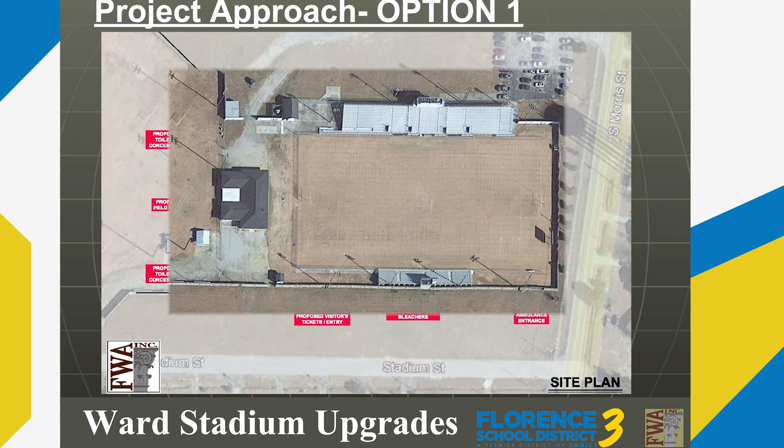First, you'll see option 1, the Ward Stadium layout, shown on Google Maps. The presentation will show keeping the existing stadium, the existing natural turf, and the existing stadium seating, which seats about 2,200 on the home side and about 1,200 to 1,500 on the visitor side. What we will be replacing is the new field house, new toilet concessions buildings, new ticket entry areas and plazas, and new sidewalks to make the entire complex accessible.

As you see in the site plan here, there is a proposed field house where the existing field house is located now. That building will be torn down and a new field house of about 5,000 square feet will be built in its place. We'll look at the floor plans in just a little bit.

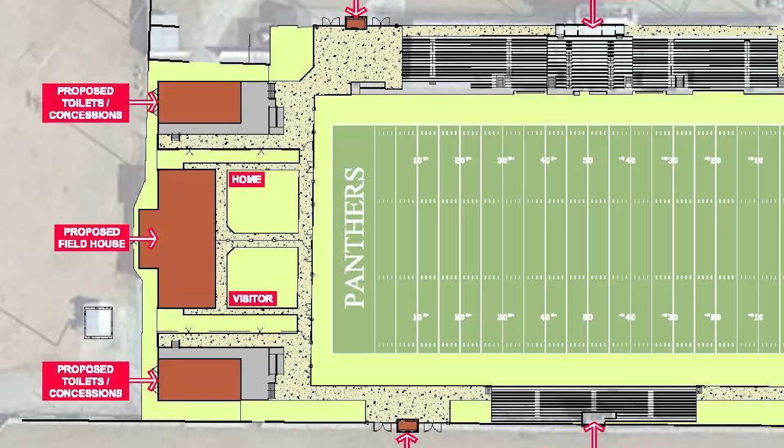On either side of that are the proposed toilet concessions buildings, one for the home side and one for the visitor side. They will be separated by fences so that the visitor and home sides cannot cross-mingle with traffic, just from a security standpoint. You'll also notice proposed visitor and proposed home ticket booth entry areas for separate entrances coming into the stadium.

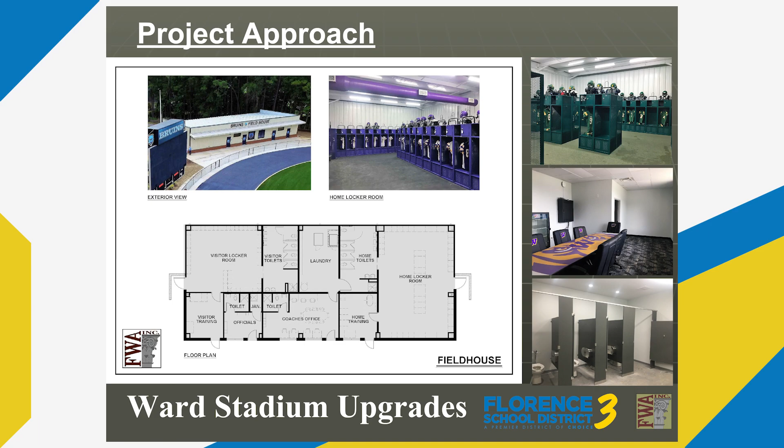Now let's look at the floor plan of the field house. You'll see it's about 5,000 square feet. This plan is a little different than the one we'll have at Lake City High School. We'll be adding about 4 showers in each of the field houses that are not shown in this drawing.

In the home locker rooms, you have home locker rooms, home training areas, and home toilet and shower areas. On the other side, you have separate visitor locker rooms, visitor training areas, and visitor toilet and shower areas. In the center of the building are coaches' offices with their own toilet and conference room areas, and to the left is an officials area for dressing, plus their own toilet area.

You can see photographs of what we built in Florence for the locker room areas. The home locker room will seat about 50 to 55 athletic-size lockers, as shown in the photographs. The visitor side is a little smaller, fitting about 45 athletic lockers in that space.

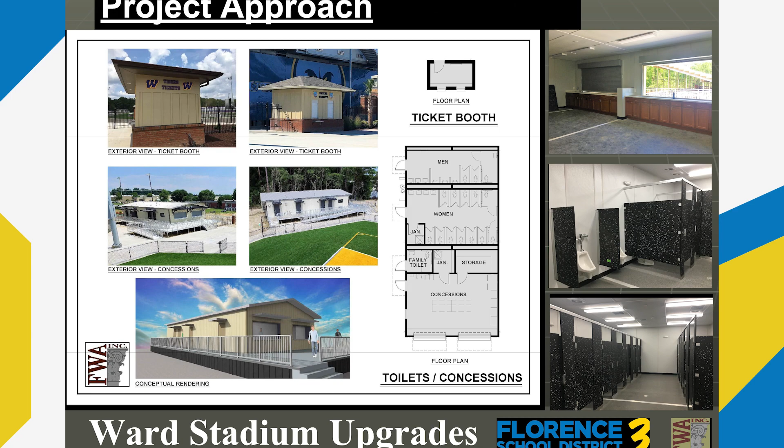The next slide shows the toilet concessions building as well as the small ticket booth areas for both home and visitors. The toilet concessions building is comprised of 6 men's toilets and 12 women's toilets with lavatories and a janitor's area. There is a family toilet separate from the men's and women's toilets, plus janitor's and concessions toilet areas. The concessions area is about 16 feet by 24 feet in size.

Each side, both visitor and home, has one of these toilet concessions buildings. They are separate from each other for security, but are exactly the same layout. You can see some of the layouts in the photographs we have from the Florence schools as well.

What's important about this particular building is that these toilet concessions buildings are modular. They will actually be built in factories and then brought to the site already put together. This makes both the time and the cost less - the cost is less expensive, and the time to erect them is a lot quicker. The field house we looked at previously is actually a built-on-site metal building, a slab-on-grade building.

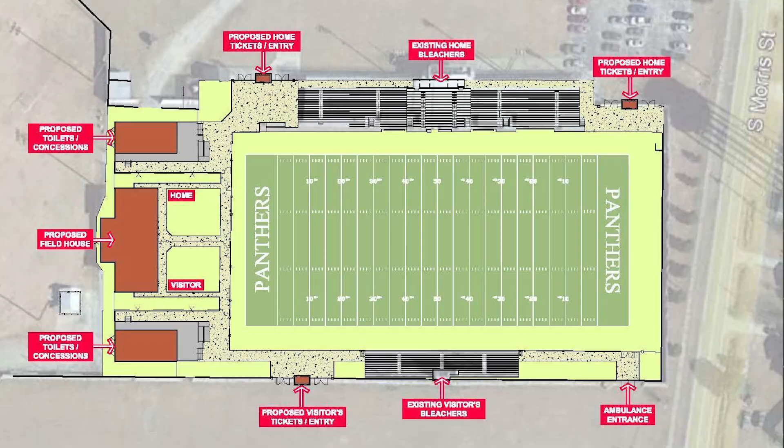So in this scenario, with option 1 at Ward Stadium, the existing bleachers will remain and the existing natural turf field will remain as well. The facilities will be upgraded, and you can see the cost breakdown of the field house, the concessions, the site work, the sidewalks, the new fencing we're adding, landscaping, and furniture, fixtures, and equipment. This comes out to be about $3.3 million for this particular project. With professional service fees, civil engineering, soil testing, and special inspections, the final cost is estimated to be about $3.6 million.

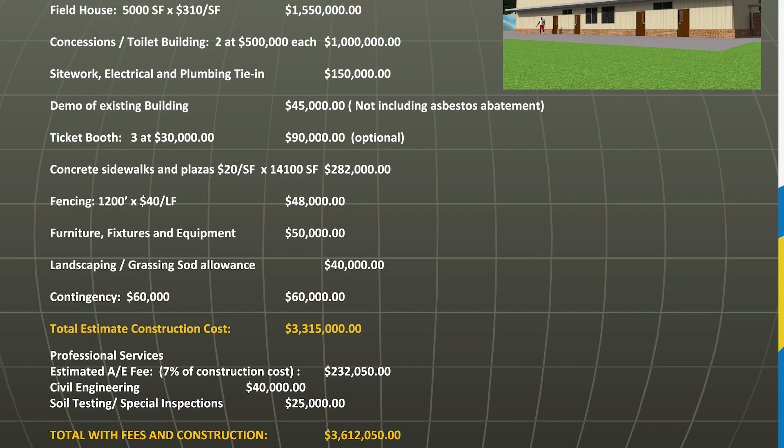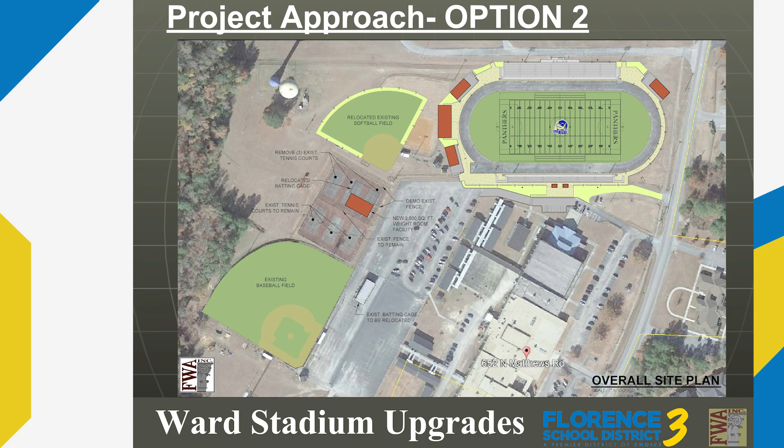Option 2 is looking at Lake City High School and building a new stadium around the existing 8-lane track area. The existing track and field area is being utilized, but there will be a new synthetic turf field proposed, a new rubberized surface track over the existing track, new field houses, new toilet concessions buildings, and new bleachers with 3,500 seats on the home side and 1,500 on the visitor side.

One of the things we're having to do on this project is relocate the existing softball field. You can see in the photograph that the existing softball field is too close to the new stadium facilities, so we'd have to shift it over and build a new softball field with new bleachers, new dugouts, new fencing, natural turf field, and new lighting.

The other thing you'll notice between the existing baseball field, which will remain as is, and the new relocated softball field, is a new 3,000 square foot weight room, and then also the relocated batting cages, now located in the parking lot, as you can see in the rendering.

But they will be moved into what is the tennis court area now, which is not being utilized. That will be a new metal building covering the batting cages, and beside that will be a new 3,000 square foot proposed weight room facility. There's still the possibility to keep the 3 remaining tennis courts if the tennis program comes back, or that could be utilized for something else, such as a practice area for sports.

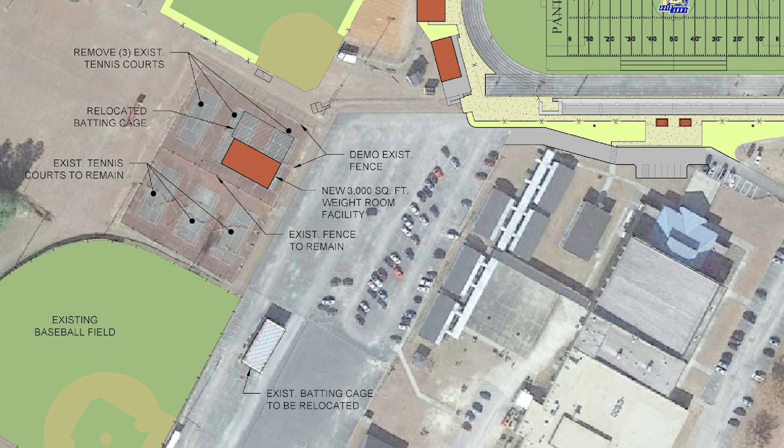So again, the layout, as you see, we've zoomed up onto the actual stadium itself. New field house at the far end. You'll notice the visitor and home ticket booths and plaza area together on one side, utilizing the existing parking at the school. Once they come into the stadium, they would be separated by fencing—visitors to the left, home side to the right around to the home bleachers—again separated throughout for security reasons.

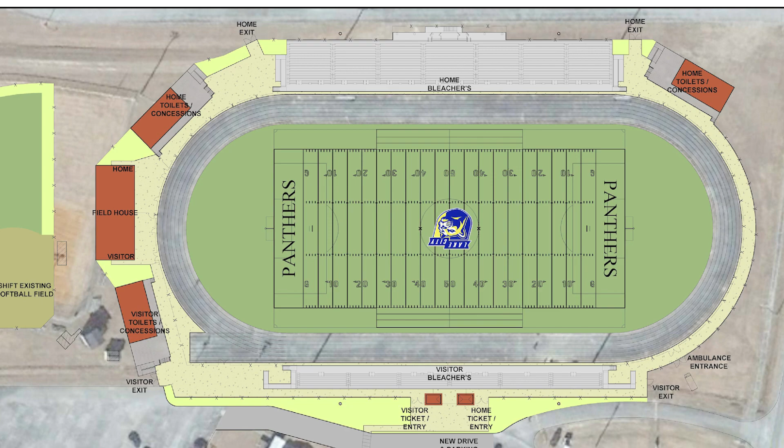The other thing you'll notice is that the existing drive that comes to the back rear student parking lot has to be relocated as well. It moves down closer to the gymnasium for a new drive that ties back into the existing parking lot. Again, the field house is basically the same, except here we're not required to add additional shower areas other than the one shower in each, because the school will be able to open up the gymnasium locker rooms for any shower use needed.

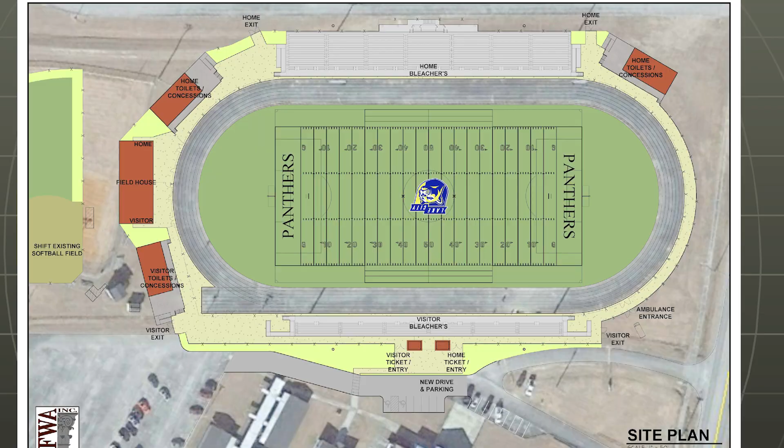The toilet concessions is the same layout we had looking at Ward Stadium. One difference on this project is, because of the number of seats on the home side—3,500 seats—we need 2 toilet concessions buildings. If you look back at the site plan, you'll notice one toilet concessions on the left side of the home bleachers and one on the right side, helping eliminate any backup or circulation issues by separating people into both sides of the bleachers.

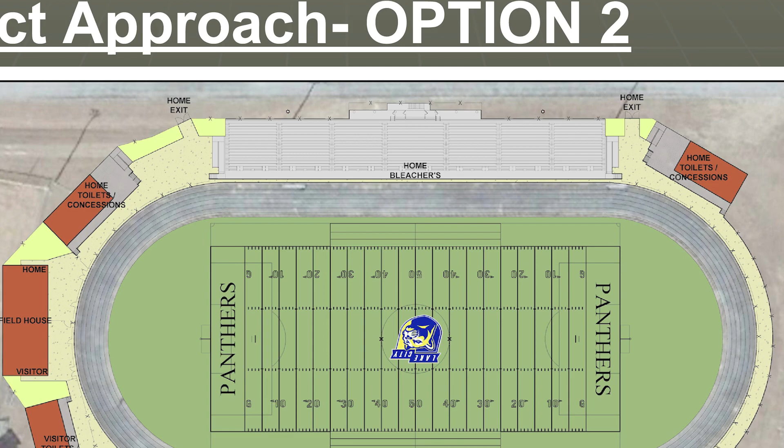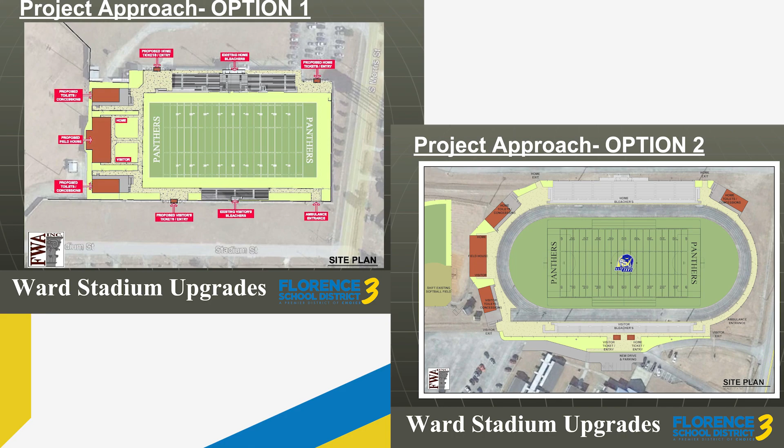So this gives you 2 of the different options available, one for Ward Stadium and a new stadium to be located at Lake City High School. At this time, if there are any questions, we'll be glad to talk with you about those.